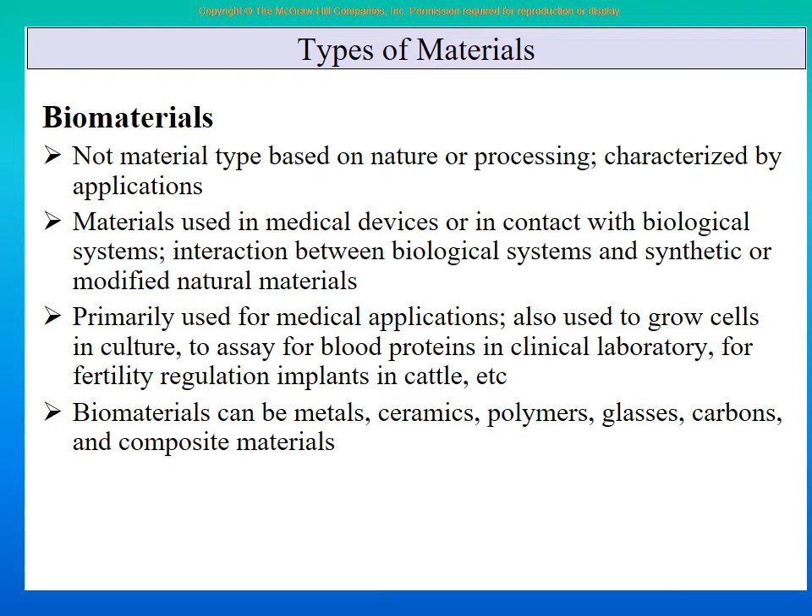So artificial heart. Intraocular lenses, this is very common now, that many people, rather than having glasses, they do this operation and put these lenses inside your eyes. So all of these, and your dental implants, very common, they are all biomaterials.

They are artificial materials engineered together by mechanical, electrical engineers and medical doctors, right? By the joint collaboration of mechanical, electrical engineers and the medical people. And you develop these things and so on, and you test them for a long time. There is something called an immune reaction. This is the name, immune reaction, that if you put a biomaterial inside the body, this is not natural. So then it may react and do bad things inside the body. So the biomaterials is not just that you have to design them in such a way that they work perfectly, but you have to design them in such a way that there is no bad immune reaction when they go inside the human body or animal body.

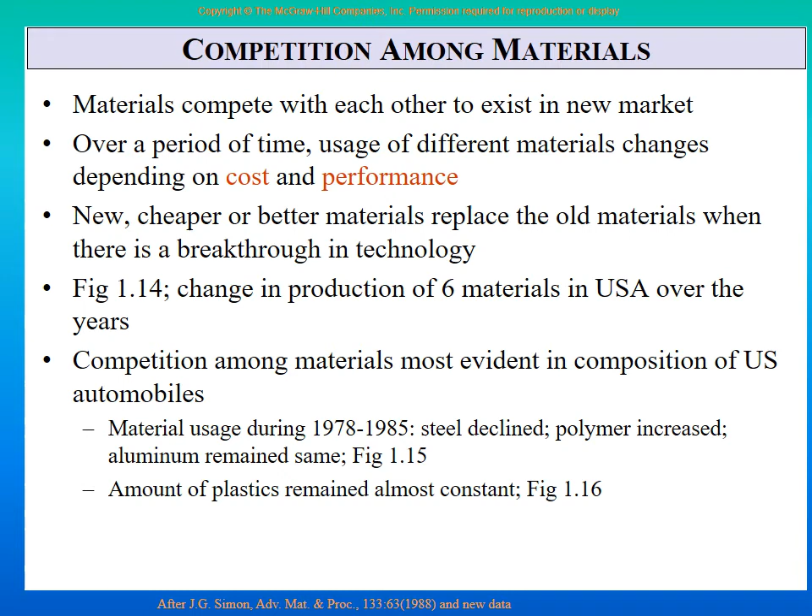So let me quickly show you what these slides are. Competition among materials - when you want to design a product, should you use steel, or aluminum alloy, or a composite? This is competition among materials.

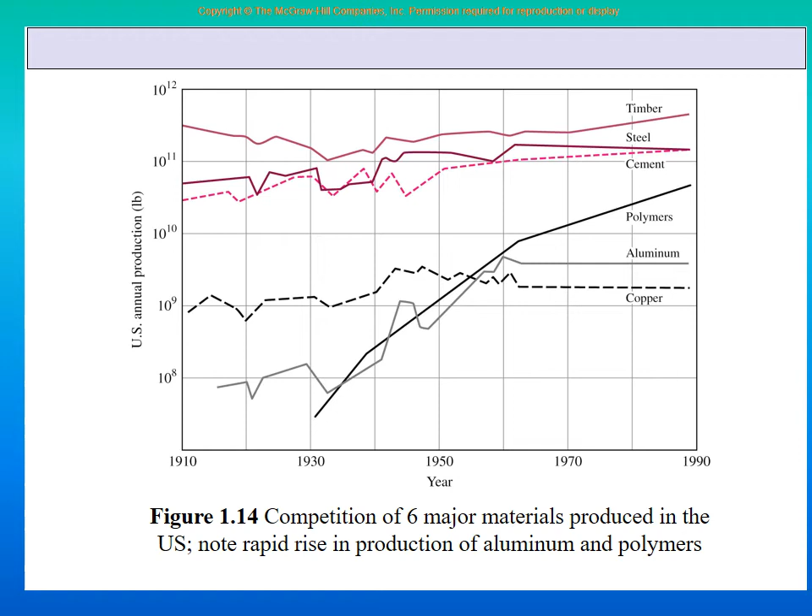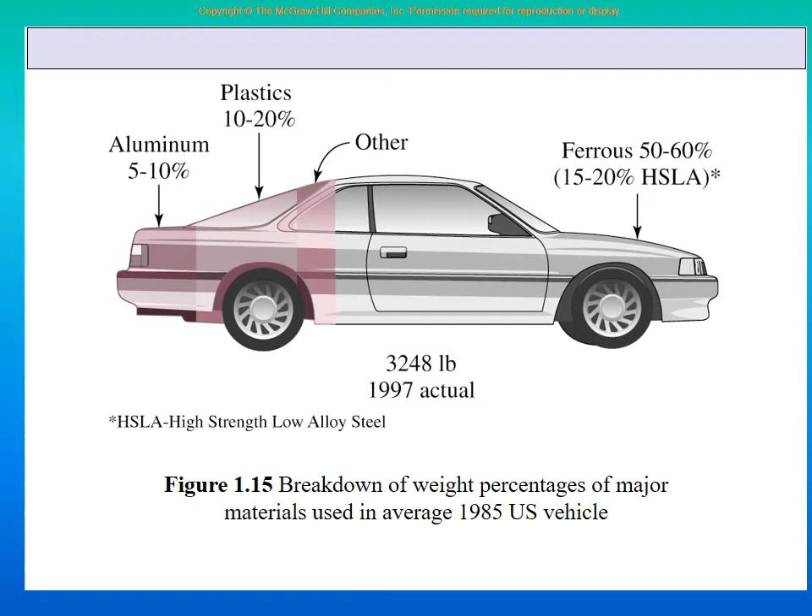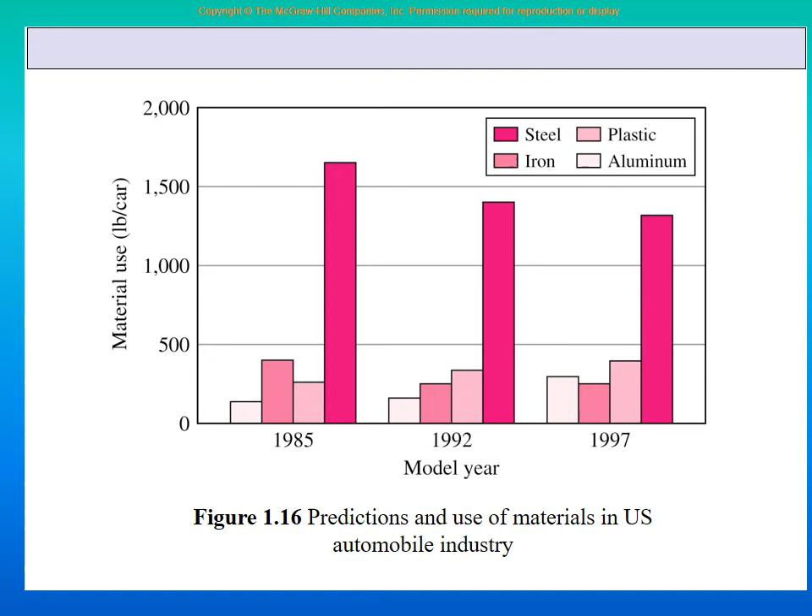Again, giving you a graph of copper, aluminum, polymer, and so on, and how they have grown over the years - competition among materials. Then in a normal car, there is aluminum, plastics, ferrous metals and other types - competition among materials in a big product like a car. Then you see here, in terms of years, how much steel, plastic, iron, and aluminum are being used over the years in the automobile industry - again competition between materials.

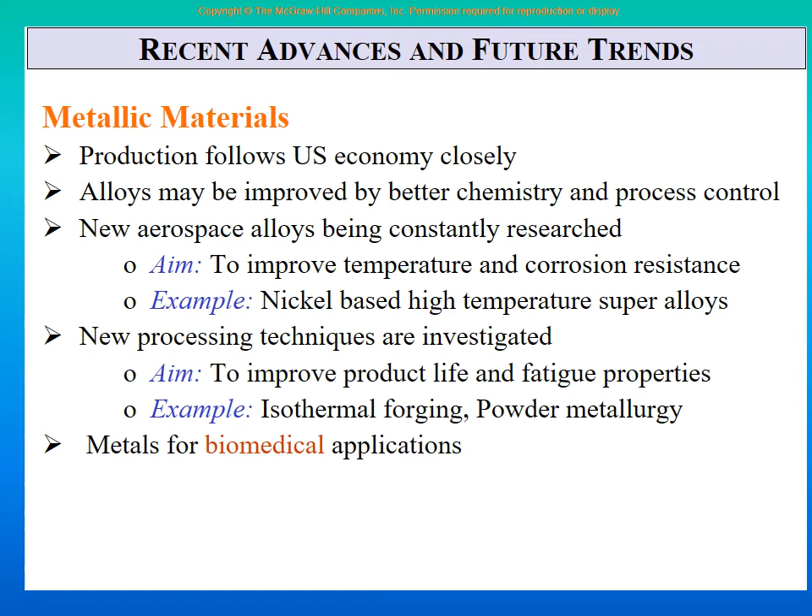Then recent advances and future trends - in the last 10-15 years, what has happened in the world of materials and what is the future trend. Why have I left it as a reading assignment? Because the categories of materials are the same. What are the recent advances in metallic materials? What are the recent advances in polymeric materials? What are the recent advances in ceramic materials? What are the recent advances in composite materials?

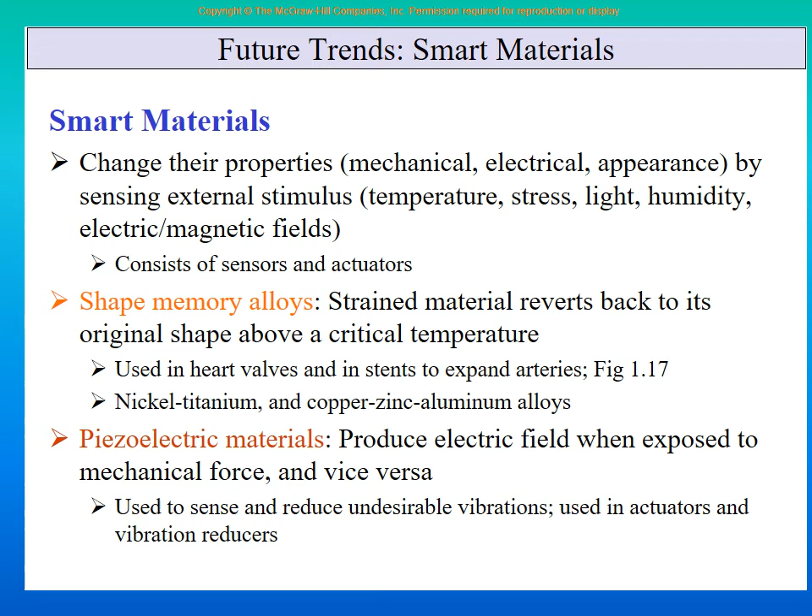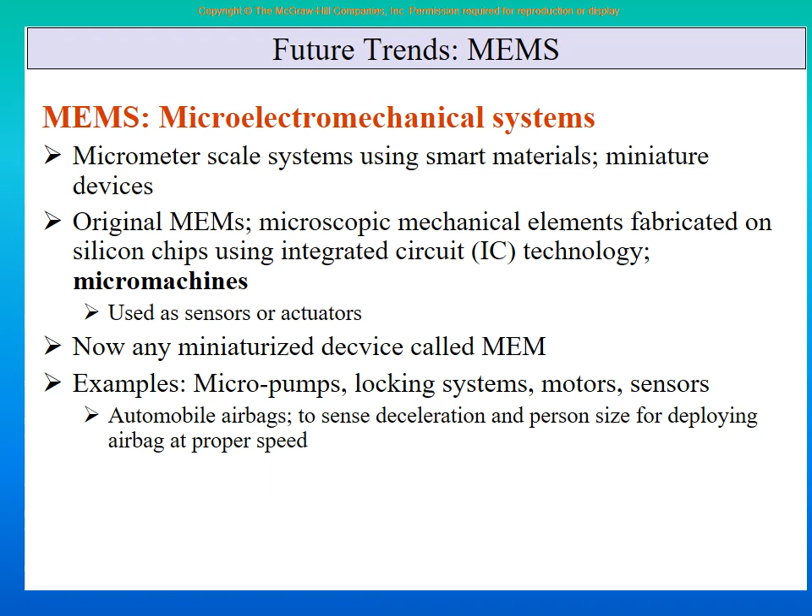What are the future trends in electronic materials? What are the future trends in smart materials? This is new - shape memory alloys and piezoelectric materials. Read about it, and some applications of these smart materials. What are MEMS - micro electromechanical systems? Future micro electromechanical materials. What are the future trends in nano materials?

What is the relationship of design, manufacturing, and material selection? Again, whenever you design a product, if you change the material, everything changes. Whenever you manufacture a product and change the material, everything changes. If you make a material of metal, you have to go to the mechanical workshop to cut it and drill it. If you make the same material of wood, you go to the carpentry shop. If you make it of plastic, you go to an injection molding machine. So this is the relationship between design and material selection.

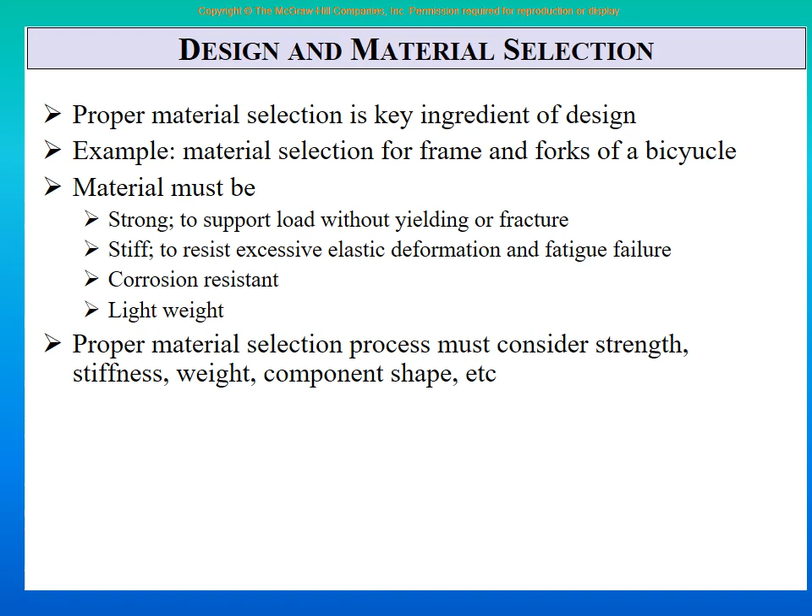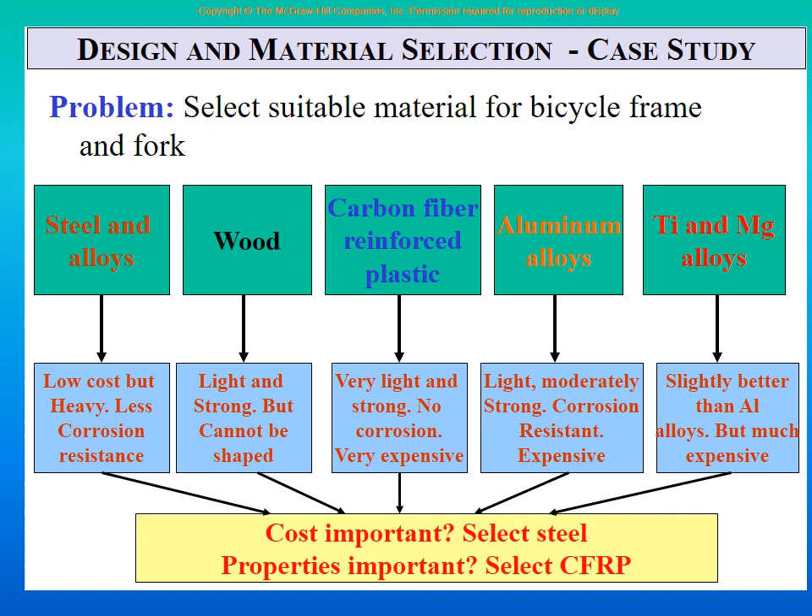Then an example of design and material selection - think about what will happen if we take steel, wood, or carbon fiber. So just read through these slides yourself and try to understand them.

So with this, welcome to the fascinating and exciting world of material science and engineering. Now you have a brief introduction of the whole course and the whole field, and that was the purpose of chapter 1. There are two things I want to achieve: you know the whole field rather than each chapter separately without knowing the whole field, so you have an idea. Secondly, you get excited about it, or you really understand that this is very, very important.

So this is the end of chapter 1. Today, even though there is a lot of time remaining for the lecture, we will stop here. We will start the next chapter later on.